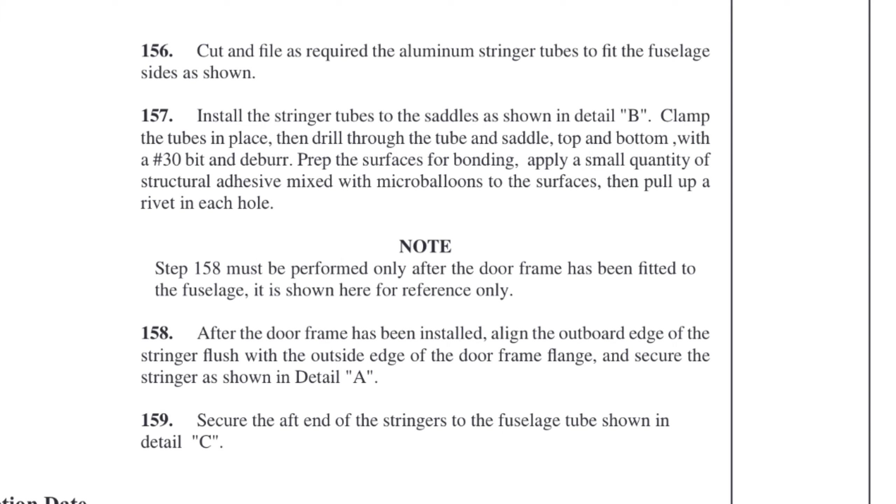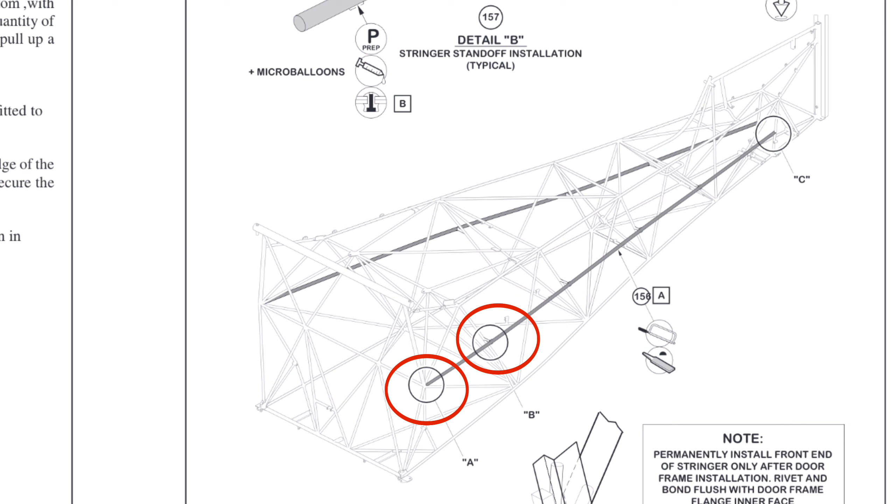Alright, cut and file as required the aluminum stringer tubes to fit the fuselage sides as shown. So we can see there's one on each side there. So I'm going to find the point A, point B, and point C. And then the note over here, it says permanently install the front end of stringer only after door frame installation. Rivet and bond flush with the door frame flange inner face.

So I think what I'll do is probably get it cut to length, basically prepped up, ready to go, and then I will save that portion of the installation until I get the door frame on. So again, I'll have another completion date that's left open, but hopefully with the majority of these pieces, looks like they get riveted and bonded with some micro balloons and possibly some epoxy. So let's get going.

So point A is here, point B is here, easily identifiable. I have another couple more attachment points back here. Then in the book it shows, looks like it's terminating on a relatively vertical member, but in the back there you can see I have a triangle with a relatively vertical member.

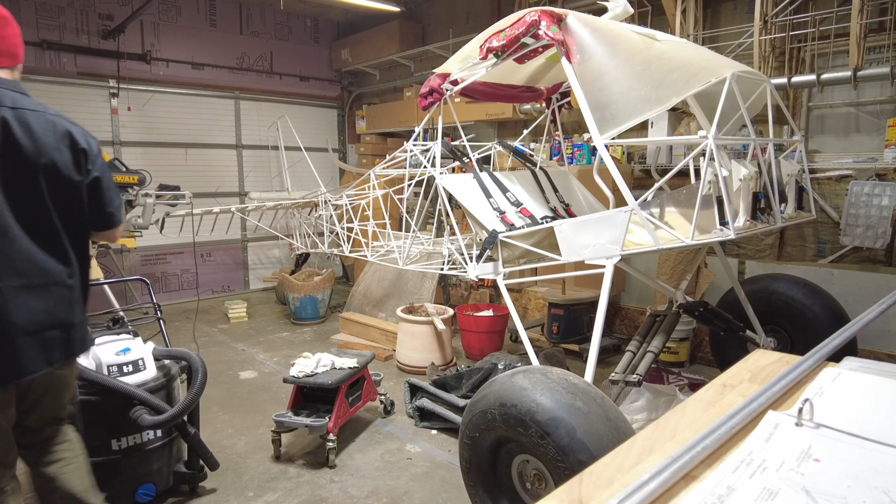Alright, so as you guys can see, the stringer material is there on top of the workbench. There's 2 of them, and they're pretty long. I think they're about 10 feet long or so. And you'll notice that one of them is shorter than the other one, and that's because I measured very carefully and I cut it. And that's the piece that I cut off there.

My camera's kind of doing its own thing.

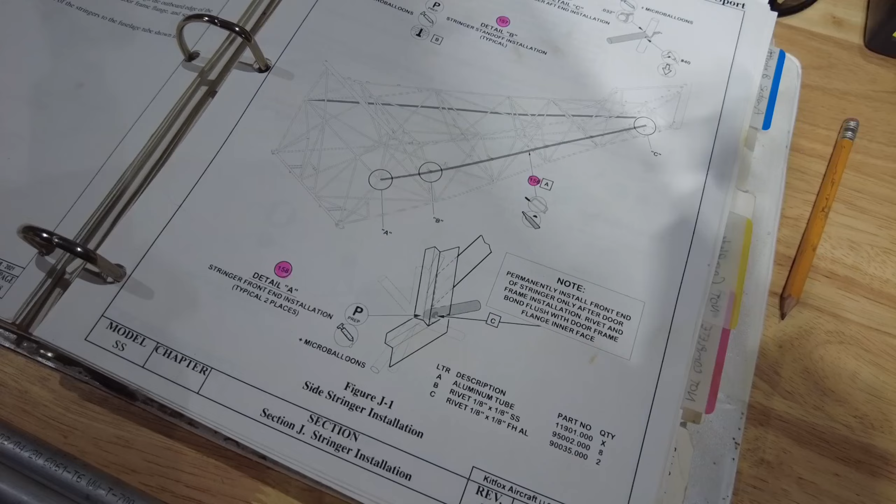Alright, so what happened: cut and file as required the aluminum stringer tubes to fit the fuselage sides as shown. So this one in particular I had laid out for the co-pilot side of the aircraft. And again, I measured it from point A to point C, which I'll show you here in a second. Alright, point A goes down here to point C, and when you get back here to C, you've got a round tube meeting another round tube. So basically you have to cope out the end of your stringer.

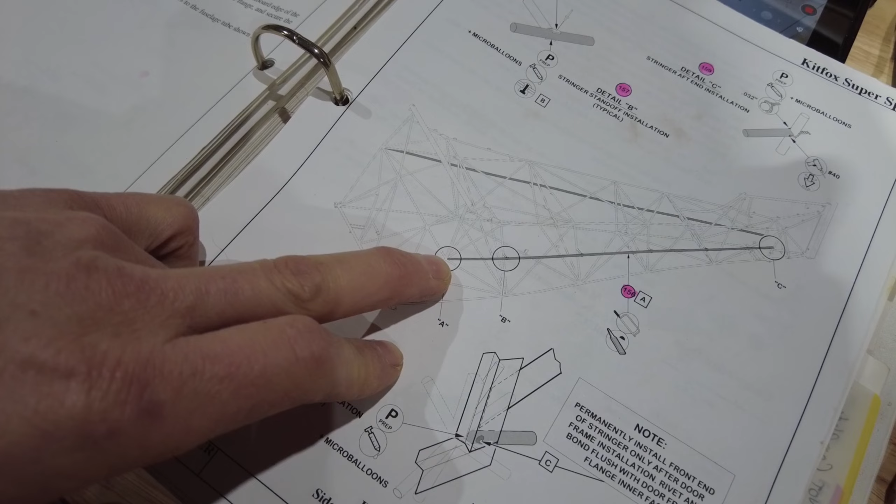And of course, since I measured from here to there, and once I started coping and then I coped on the end of A, I came up short. So I don't believe this is a structural member of the aircraft. I believe it's there for a bearing surface when I put fabric over it. So another phone call that I have to make to Brandon. I did call him today. It's the day after Thanksgiving, to see if he could give me some inputs on whether or not I could...

Hello, camera. I'm up here. My face is up here. Nope. Up here. There we go.

So I gave him a call to see if I could, in fact, swap out part B with part C, part B from the previous episode where I was putting the seat belts in. Basically, I got two bolts. One of them's a little bit longer, and bolt C goes up top, and that one's a little bit longer. And I would like it a lot better if I could put bolt B in there, because bolt B is shorter, and I can put the washer and the nut on without hitting any other members. So I just called, left a message.

I'll probably get a call on Monday, I would imagine, after the long Thanksgiving Day weekend. So in the meantime, I'm going to go ahead and clamp this stringer to the airplane so you can see what I've got laid out. I do have it all marked. Got it marked and drilled right now, where it touches the points on the fuselage. Probably can't see that. Maybe there you can.

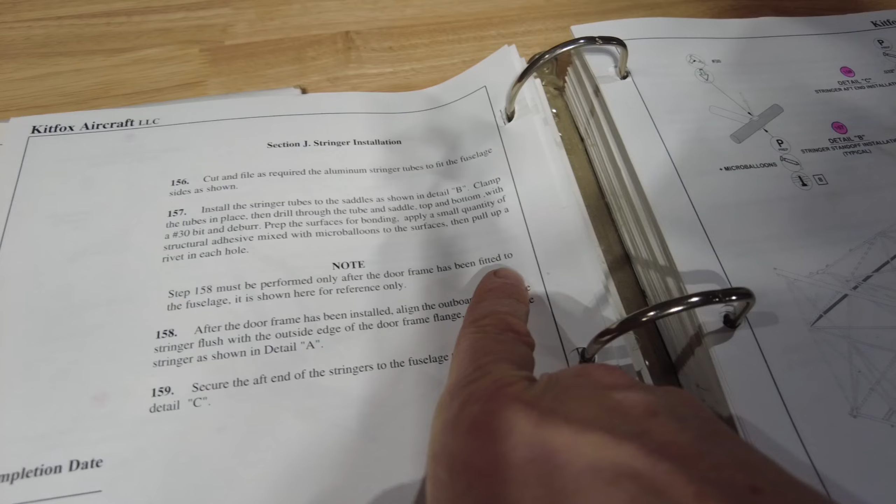I just looked at step 158. Must be performed only after the door frame has been fitted to the fuselage. It is shown here for reference only, and that is right here. That's the area where my piece is short. I'll take you over here. So right here, where this guy's short, that's not supposed to go in there until I'm putting the door frame on.

So maybe what I'm going to do is leave that as is. I'll just let it stick out where it sticks out naturally. I'll epoxy all these and rivet them in place and leave this one till the end. So maybe I didn't screw up. I need to clamp the tubes in place, drill them, which I've already done within the saddles, top and bottom, with a number 30 bit and deburr.

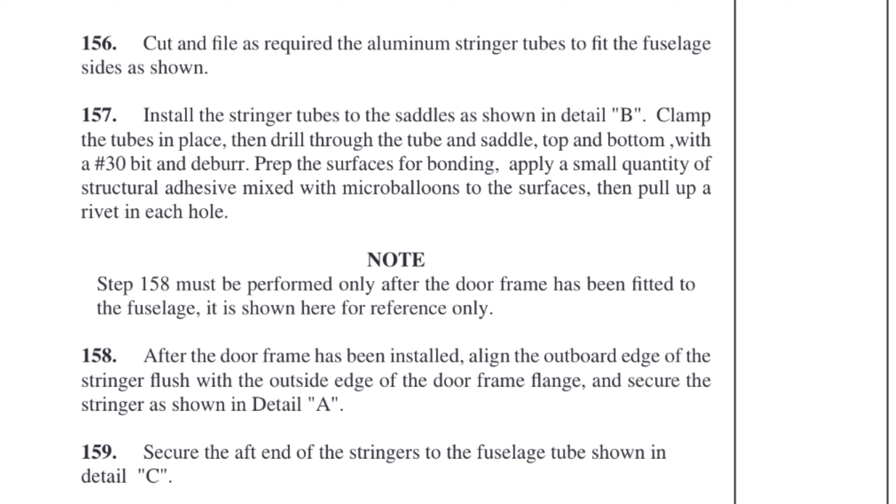Prep the surfaces for bonding, so I'm going to hit those with a little bit of Scotch-Brite. Apply a small quantity of structural adhesive mixed with micro balloons to the surfaces, then pull up a rivet in each hole. We'll be scuffing it up with some Scotch-Brite, so I'll do that here in a minute. What rivets do we need?

We need some 1/8 by 1/8 SS, stainless steel. Those are 95-002. It says I need 8 of those. One, 2, 3, 4, 5, 6, 7, and 8. Alright, 8 of those.

Then we're going to need 2 of the 1/8 by 1/8 FH, I assume that's a full head, AL, which are aluminums, but that is letter C. So 2 of those. Those are going to be required when I do put the door frame in. So this gets done once I'm doing the door frames. Right now I'm going to leave the front of the stringer detached.

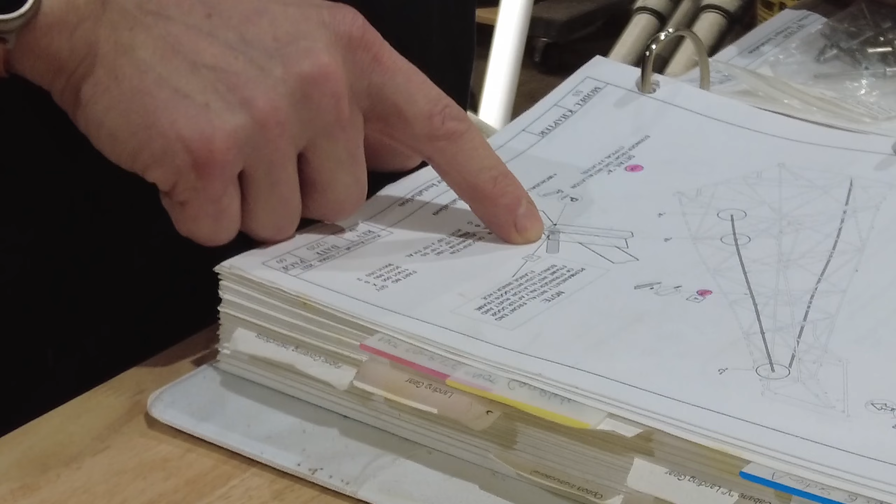So letter C, I'm going to put an asterisk down there so I remember later on why I left that out. Right here.

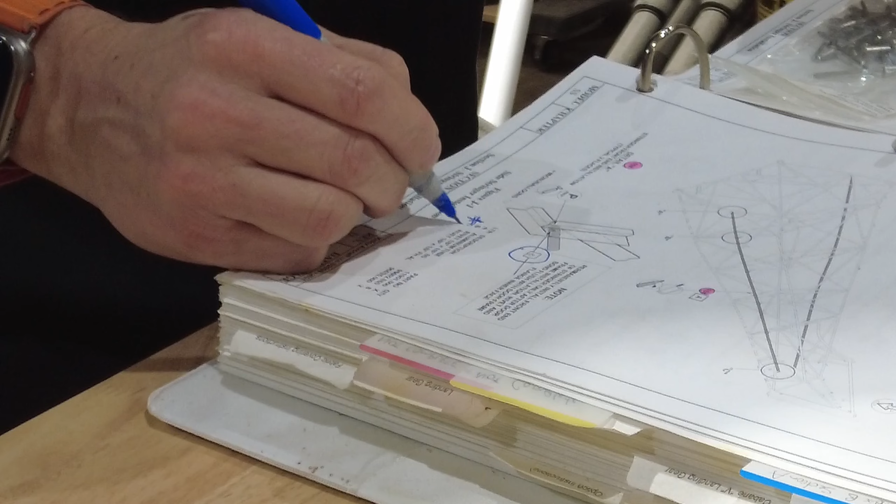And C note. Even though there's already a note written over there, sometimes we don't see the forest for the trees. Okay, so I have the rivets that I'm actually going to use. Put those back in the case to keep the shop organized. Otherwise it quickly gets

unorganized. So I've got my aluminum tube, I got my rivets, I got my Hysol, I just need to mix them up. Let's do that. So this is one of my favorite parts, mixing up some Hysol. And you might be asking, why are you mixing up Hysol when you've got to do some prep work yet? Because the Hysol has to sit, not cure, I think it has to sit for 30 minutes before it's ready to be used.

So let's take a look at some instructions. Mix ratio 1:1. Where's the waiting part? Well, I read something. I'll find the answer to that in just a minute. While I'm looking for that, I'm going to mix some up. So we're going to turn the unit on. It's in grams already. 3 grams, 5 grams. Tare. My scale has a little delay to it.

It says to mix up a small amount, and I always mix up too much. So you can see how little that is. That's all I'm going to mix up. That's one part, the resin adhesive. So I've got 3 grams there. Call that good. Set the stick over here. And if I can use the same stick, on the last one I'll just use that one to stir it. I don't know why I always try to save something that's very cheap, but I don't mind breaking something that's very expensive. We'll get to that later also.

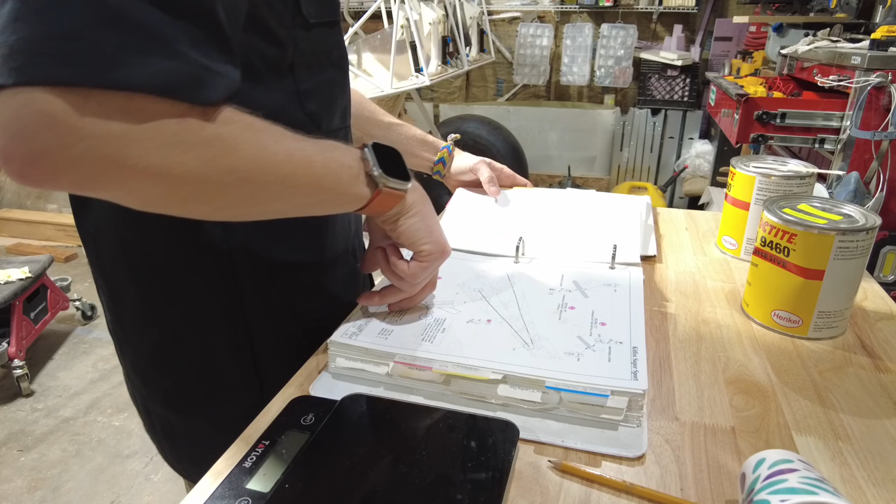Maybe I made that part up. Oh, I'm thinking of the epoxy to cover the wooden spars with, or the wooden ribs that I put in. I think that's a 30-minute wait. Anyway, okay, so I told you wrong. So no wait required according to the book for the EA 9460. Now I just have to find my microballoons, which are in a box somewhere behind me. Let me see if I can find those.

And there they are, old micro balloons. Let's see what they look like. It looks like dust. So what's a good amount to mix in there? Let's figure that out. Back to builder's tips.

The adhesive should be mixed with a small quantity of microballoons. The micro serves to keep the adhesive from completely squeezing out from between the parts, ensuring that the dissimilar metals never come in physical contact. Where a large structural fillet is required, the adhesive should be mixed with cotton flox because it adds both strength to the fillet and sufficient body to the adhesive to keep it from running.

Alright, well, I'm not doing a large fillet, so I'm going to mix a small quantity of microballoons. What would a small quantity of microballoons look like? Well, I would say I want it to be evenly dispersed inside the... Well, that stuff is like flour. So you can see it's very dust-like. In fact, I'm just going to pour some in there because it's very hard to even pinch some between my fingers. I'm going to say that's a small quantity. And I'm going to stir it in.

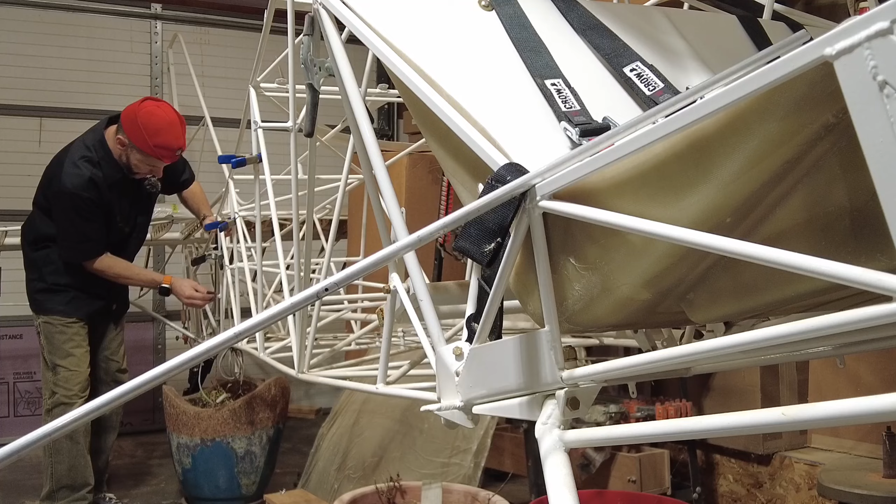something to stick to. And then when I'm done with this, I'll probably wipe it with some MEK or some denatured alcohol to get any contaminants off there, which could be from my fingers, oil from my skin. It doesn't take too much to get it scuffed up. You can see the paint scuffs almost immediately once you do this. And I'm going to scuff this back piece back here too, where it's going to get safety tied with wire. Alright, those are all scuffed.

Let's get some alcohol. I got a little denatured alcohol and rag. I'll wipe those off. Squeaky clean. I think I'm also going to scuff the aluminum, and you're not supposed to use sandpaper on aluminum. So this is the aft portion, so I'm going to scuff that a little bit, even though it's quite scuffed from where I was filing on it. This is the front here, so I'm not going to scuff that up because I'm not gluing it yet. So I've scuffed all these other points up. I'm going to grab that denatured alcohol again, clean those up.

I'm going to set this back in the fuselage and put a little bit of epoxy on my saddles. So let's see if we can get you close up. All right. Popsicle stick seems to fit in there nicely as far as the radius goes. I'm just going to make sure I've got everything covered, all the surface area on the face, and wipe out any excess. And I'm going to do the same on all of these. Now if I cover this up, it might last while I mess around with the stringer on the other side, depending on how fast I move.

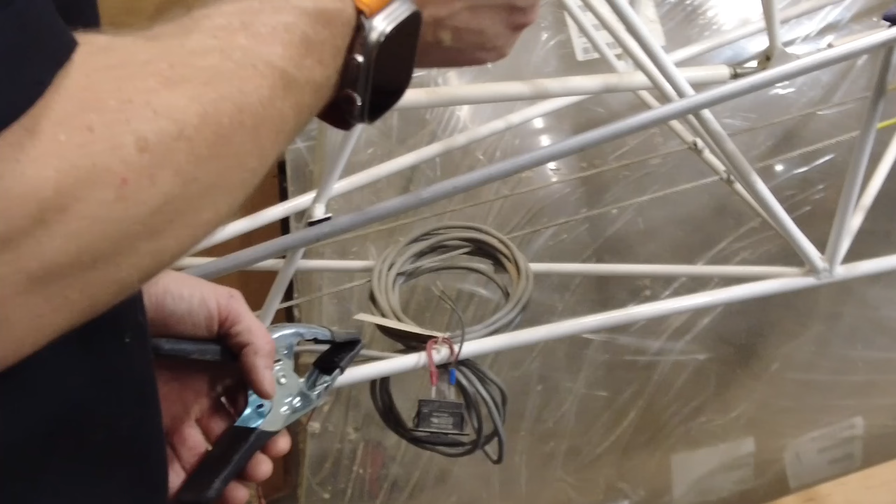Hard to see through me, but here's the post. It's going to get clamped. I'm just going to pull it in there nice and tight. Maybe I'll do it. There we go. Okay. And I'm going to go get my rivets and put a rivet in. I think we'll start with this one right here.

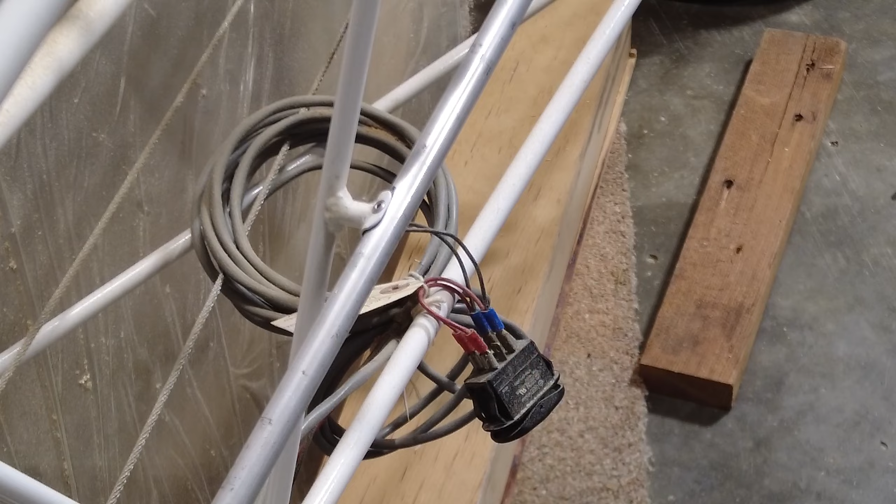Alright, 8 rivets. Alright, for this back piece, which is kind of a sloppy mess right now, I'm supposed to use some .032 wire through the back end. I've got my micro balloons already inside the epoxy. Let me see if I can locate some of that wire. I'm going to go look in box 2, because that seems to be a great place for it. Alright, box 2 was fruitless, so I went to trusty box 5, and I found it, .032 safety wire.

So now I'm going to get my cheater's pliers. I suppose any A&P will look at me and say, don't ever use those. Maybe someday I'll know why, but right now I've got my .032 safety wire and my cheater's pliers, which I got on Amazon, and they're in one of the lists of tools I have listed down below.

So I'm going to run a little bit of this through this hole and out the other side. And then take it to the back of the plane. And kind of match them up. And I'm going to clip this somehow. It's the first time using these on camera, so certainly there's a, there we go. Okay, I'm going to clip that off equal with the other piece, plus or minus 0.0623 millimeters.

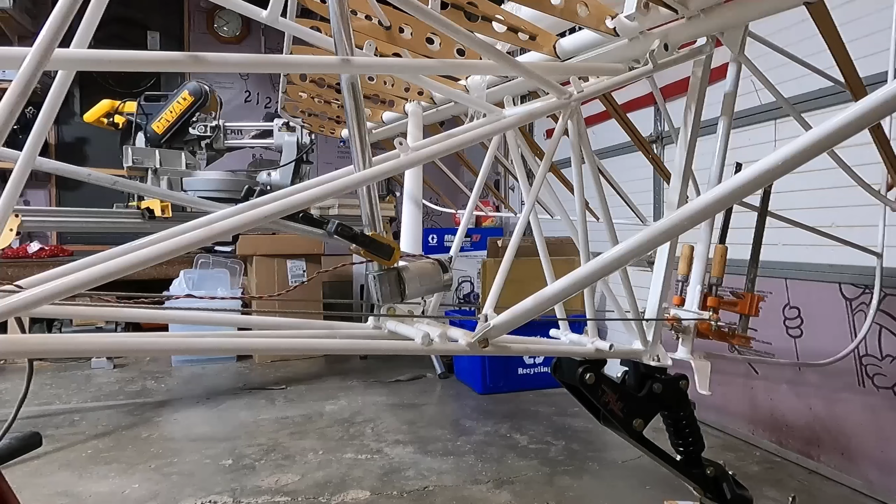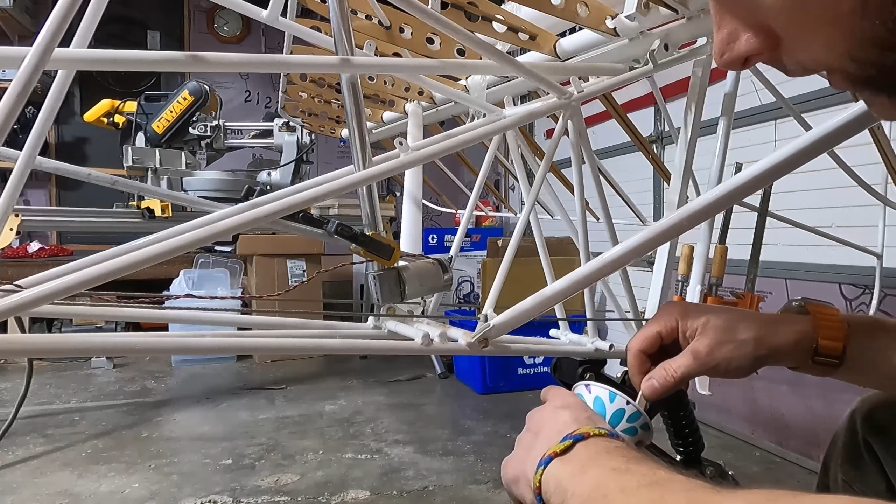Looks like I have plenty of goop on this side. Not much needed on the bottom there. And a little bit on the safety wire, but I guess if I have to take that off, I'll probably have to cut it because this stuff doesn't really remove. That looks not too bad.

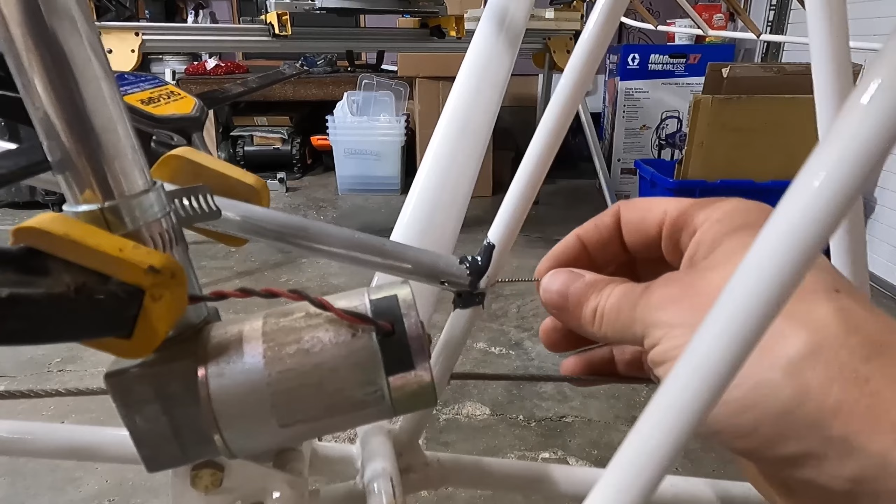I would say each epoxy job is unique. So if you can see how it looks on this side, the safety wire actually looks like a professional did it, thanks to those safety pliers, but the goop needs to go up in there a little bit better. I'll see if I can finesse it with my popsicle stick so it touches. There we go.

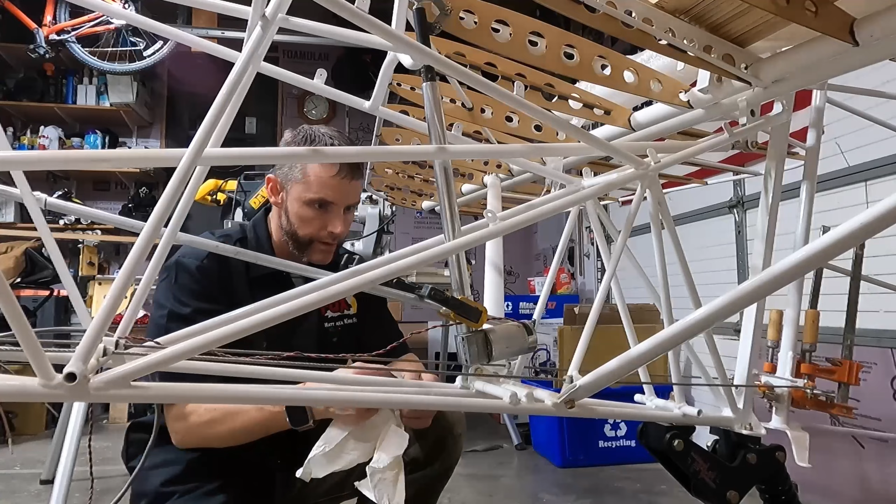And then I'll probably get a few popsicle sticks and try to get this off. It doesn't really wipe off, and I don't want to get it on my fingers because it doesn't come off your fingers for several days either. So anyway, this one I would say is in. Well, let me go get a rag or something and try to clean that up. See if I can capture that on camera because it's so exciting.

All right, I'm going to try on this side first with a little bit of paper towel where I overshot the epoxy on the stringers on the horizontal stabilizer. I'm going to have to, at some point, go back and sand all that down and try to make it smooth. And I bet that's going to be a fun time. Like I said, it's very hard. That actually looks pretty good there. Try to do something similar on top. I've got an abundance of extra.